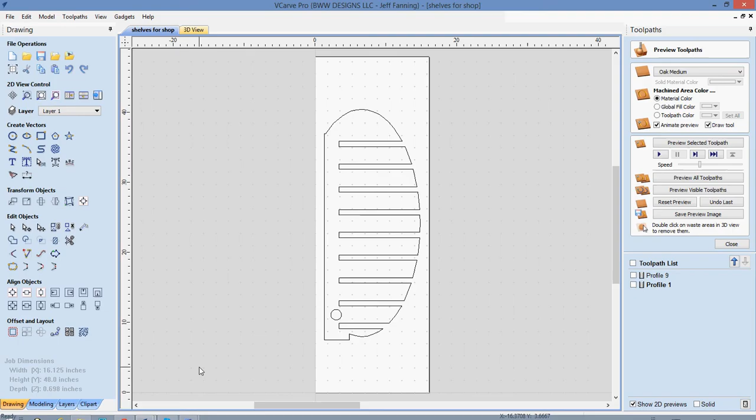I'm going to create a new file. I'm going to make a shelf, and I've made this shelf for my shop. I've got a lot of people that liked it, so I'm going to do a little video on how I drew it out. It's pretty simple, kind of for the newcomer. Here we go, here's a new file. I'm gonna hit new file, and right now it's at 48 by 49 by 96.

I don't need that much. Let's just make it 16 inches wide by 48. And my thickness is going to be 0.75.

I zero from the bottom when I cut through from the surface of my spoil board. I don't like to spoil the spoil board. And then I put my XY in this corner. Some people like to put it in the middle like that, but I put it in the corner.

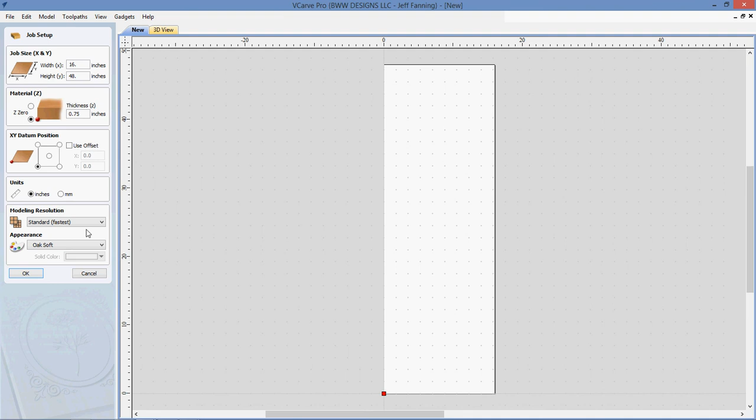Inches, and I'm going to put it on standard speed for resolution, and I like oak. I'm an oak guy. Alright.

I made the shelf, and I use plywood a lot, and I have spare parts laying around. I wanted to be able to remove the shelves and make them different lengths and different heights, for different amounts of loads of wood that I needed to stack on these shelves. I can do that, you'll see in a second.

So I wanted to make it with plywood, so I made it 0.75 inches because plywood is never 0.75, it's always less. So it always will work. It came out a little tight, but it works.

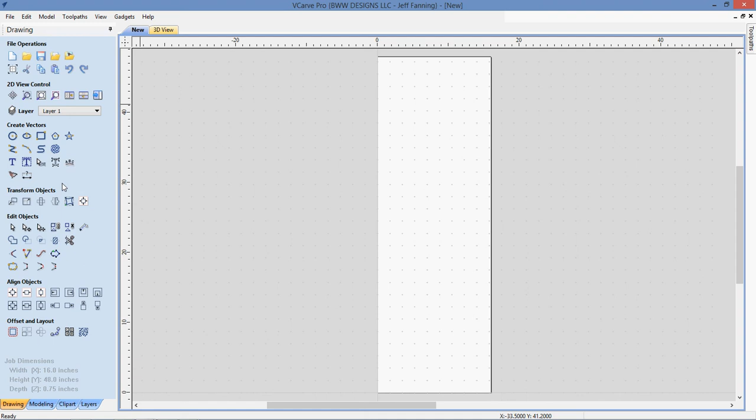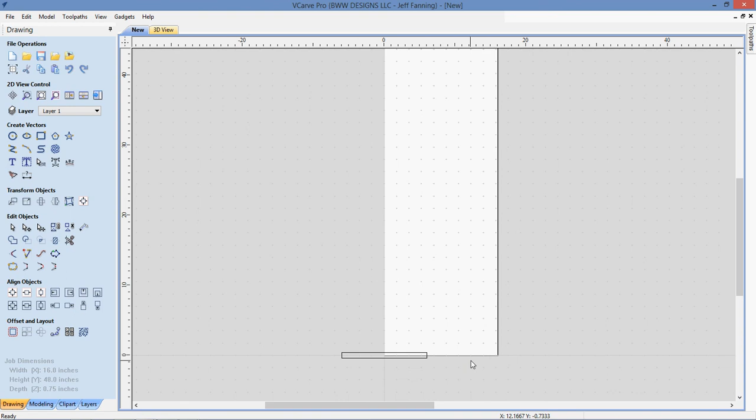Anyways, so we're going to get started. I'm making a rectangle here, and it's going to be a simple rectangle. I'm going to make it 12 inches across the width in X and 0.75 inches high. So we're going to create that, hit that button, and it pops in over down here. So I'm just going to F9 it, I call it, to the center.

And I want to make 9 of these. So I'm going to go to array copy, and then we make a copy of array copy on these, and I'm going to want 9 of them. I want 9 shelves, I mean you could put 15 if you wanted, I'm just going to make 9. So the gap I want in Y, I want them to be at least 2, and they're going to be 2.5 inches apart. I'm going to hit copy.

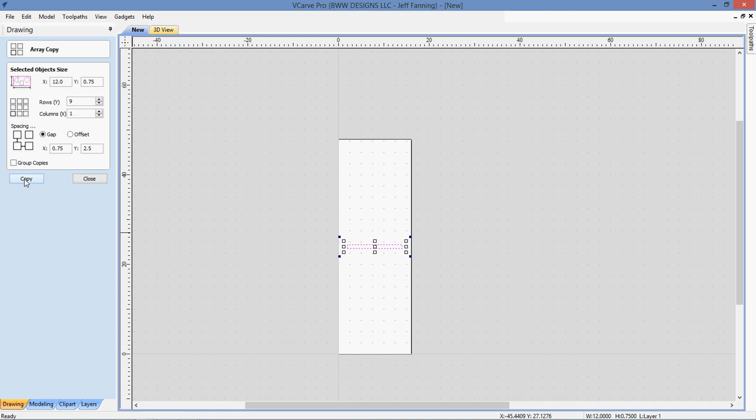Okay, and then now I'm going to F9 that, just hit F9. And now they're 2.5 inches apart, and those are what the plywood boards in between are going to sit on. You'll see here in a second.

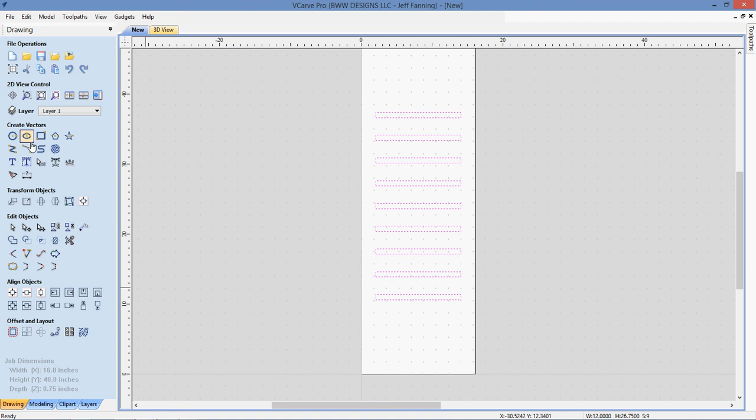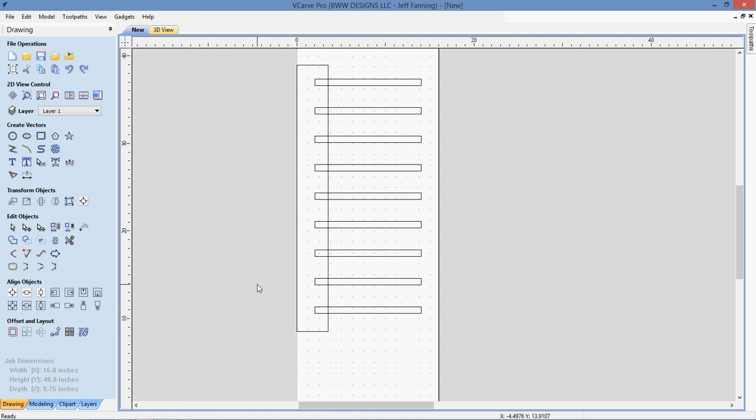Then I'm going to make it just a simple rectangle, and this is going to be the base of it. I'm just going to run it along this edge here, and I just want it to be a little longer on the top and bottom, and there it is. So this is what we got. So this is basically what it looks like.

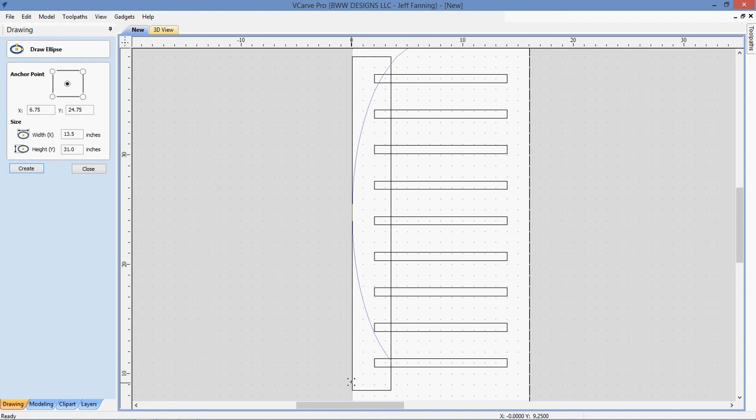But then I thought I'd be creative and make an ellipse, and take this ellipse and semi-center it in here somewhere and drag it. And we're going to drag it to the edge, and that looks pretty good. So we drag that to the edge. Okay, cool.

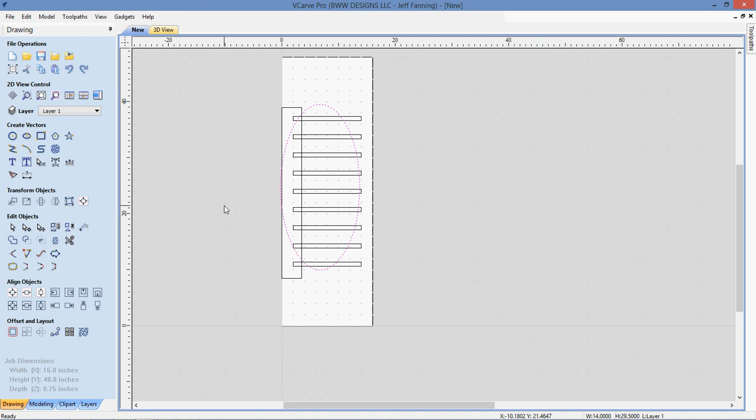Close, I don't like, I want to make it a little higher up, so I'm going to stretch it this way. And that's too high, that's cool. And stretch it a little bit down here, come down to there, to this point, I wanted to intersect there.

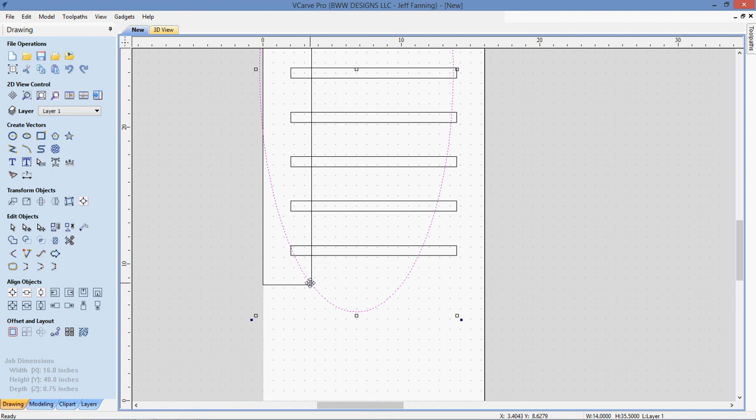Okay, now we're just going to cut some vectors. I'm going to cut these vectors because this is the shape of the shelf. It's going to be a curve, and so I don't need these. So we're just going to click these off. Simple. Oops, edit, undo.

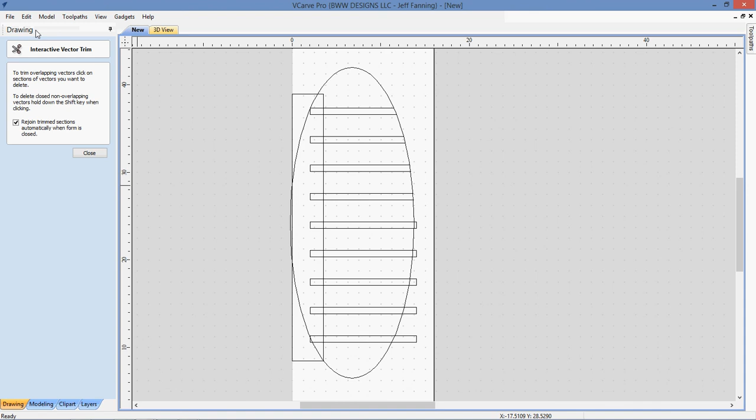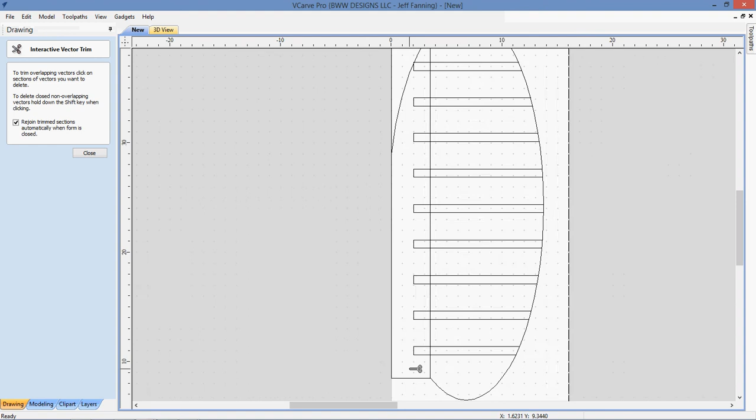Click, click, click, click, click. Okay, and I want to click this outer part, I don't need that. And this circle, I don't need that. And I don't need this. And this circle here, don't need it. Alright, click, try to get rid of this circle here real quick.

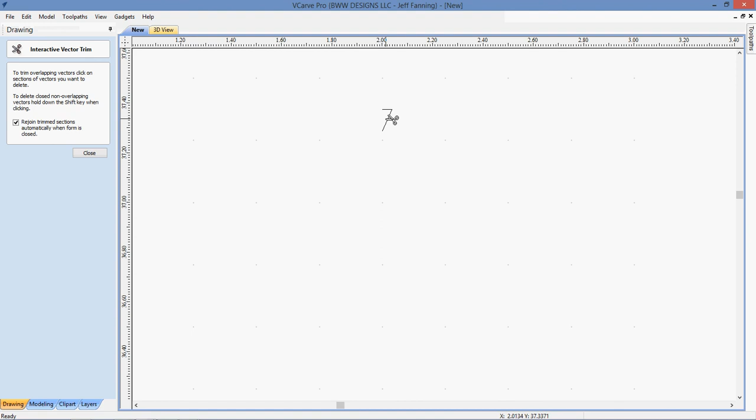Now we got a circle, and now we're going to remove this. We're going to remove these parts inside here. That's funky. Once in a while you get a little funky piece like that. And these should all click off just fine. Yeah, and we're just going to click these off here.

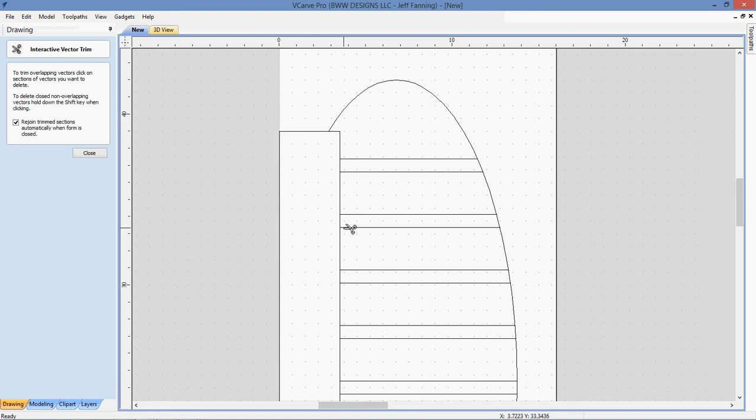We don't need these pieces. Let me undo these trims, I need these pieces in here for now. Now we're going to click these off. I don't need this piece.

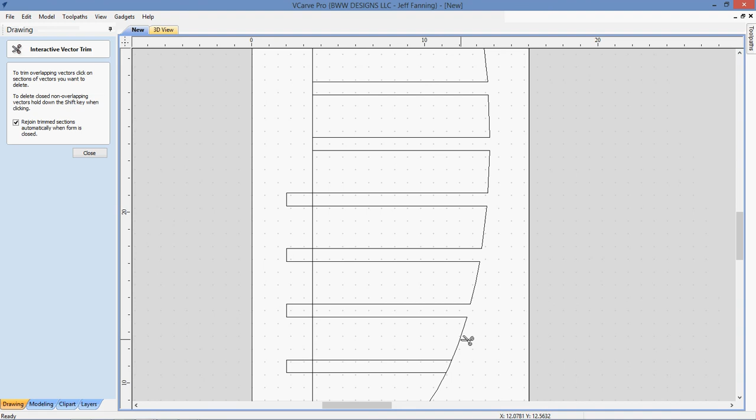Click, that's what was screwing me up earlier. Click, click, click, click, click, and click, click. All right.

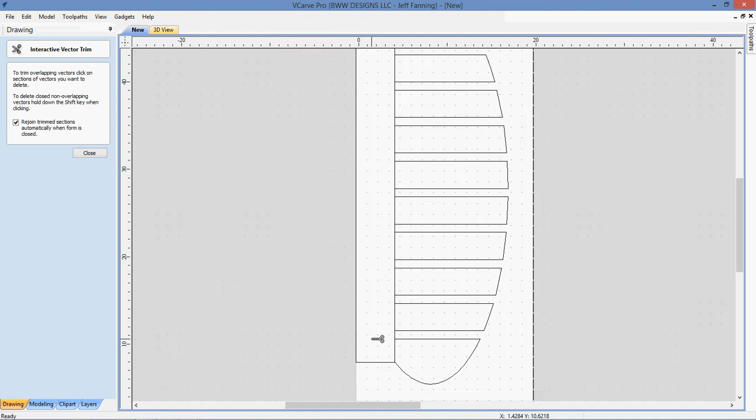Now, here we go. So we're going to click off these. We don't want this, this is going to be our shelves, and we got this funky thing going on down here. Okay, here we go, so there it is.

Well I got some more clicking to do here. I got to click off these because I don't need this. This is going to be part of our shelf, shelf, shelf.

So we just click this, this, this, this, and this, and this. Now we got a funky looking shelf. See, and it's pretty cool.

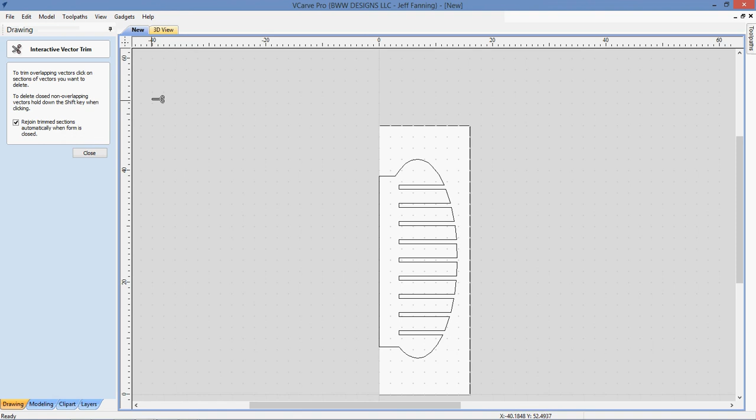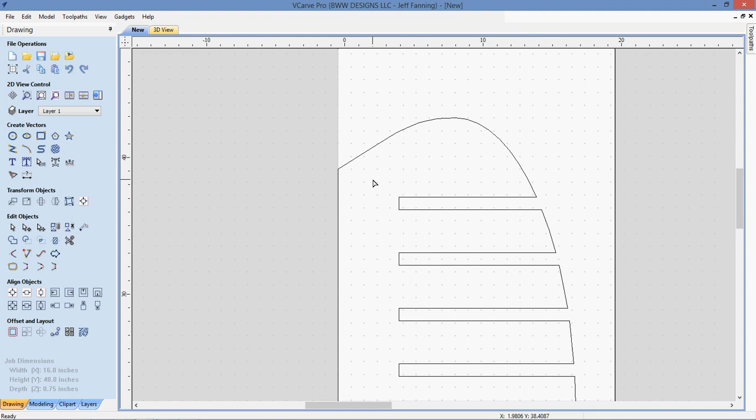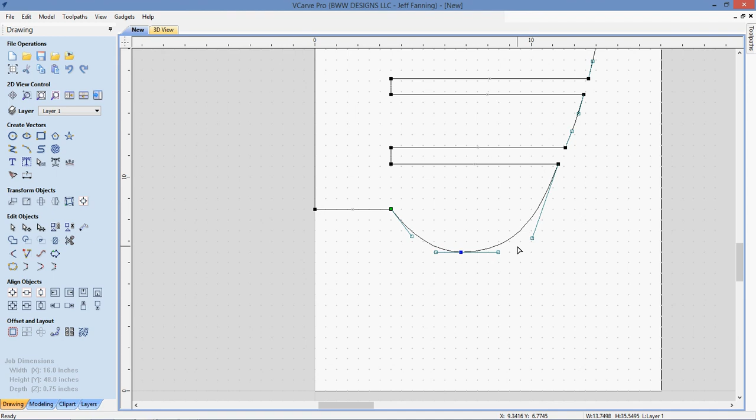There we go. That looks alright. Looks pretty good, looks pretty good. A little more curve on it. You know, I just like to make some curves. Why make it straight when you don't have to? Because that's why you got a CNC machine.

Okay, so here we go. I'm going to F9 this. It's going to fit right in the middle there. Looks pretty good.

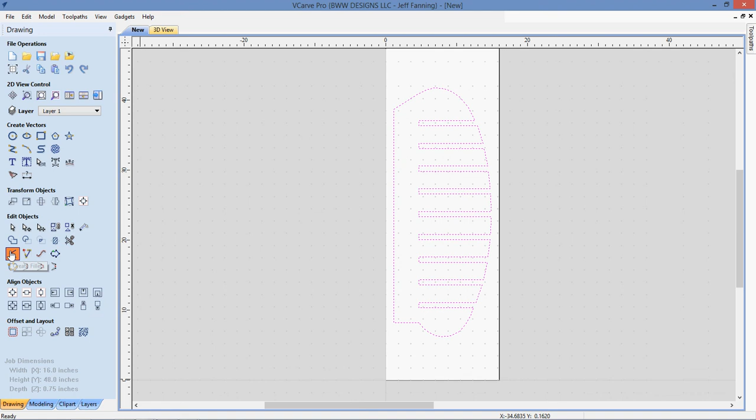I am going to do one more thing, I'm going to hit some fillets. I like to fillet a quarter inch, using a quarter inch bit around some of the edges, which there aren't that many. I could do all of these on the inside and curve them all out, but I don't need to.

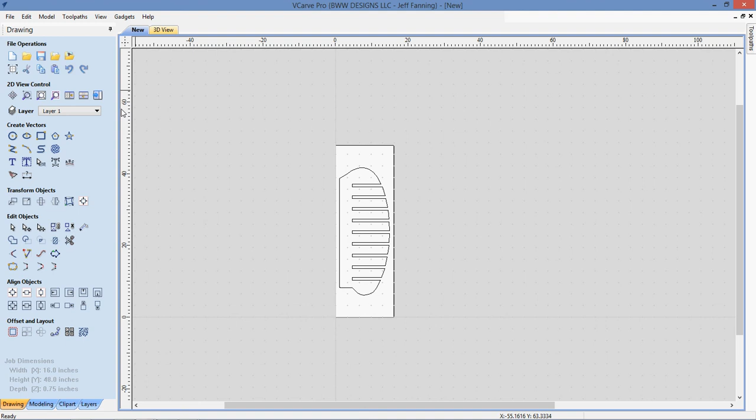Alright, I'm just going to go over here to the toolpaths tab, this little button over here. And we go over here to Profile, Toolpaths. And we're going to profile at 752, and we're going to go outside.

You know, we could add tabs. I usually on plywood do my tabs at a length of 0.127 with a thickness of 125 in 3D. I like 127, 125. They're a little dangerous, but I don't really have that many problems, and it doesn't leave barely any tab.

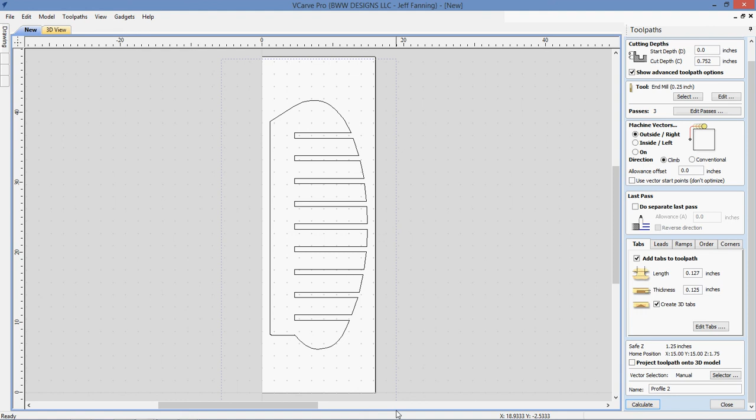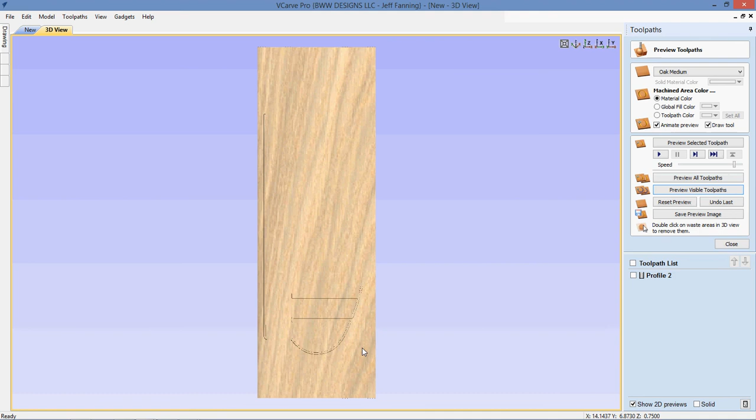It's a good measurement for me. I'm just going to calculate that once I highlight it. It's going to cut through, and preview visible. Hold on a second, we are not going to do it that slow. We're going to preview this, and I'm going to reset it for you, and again, preview visible.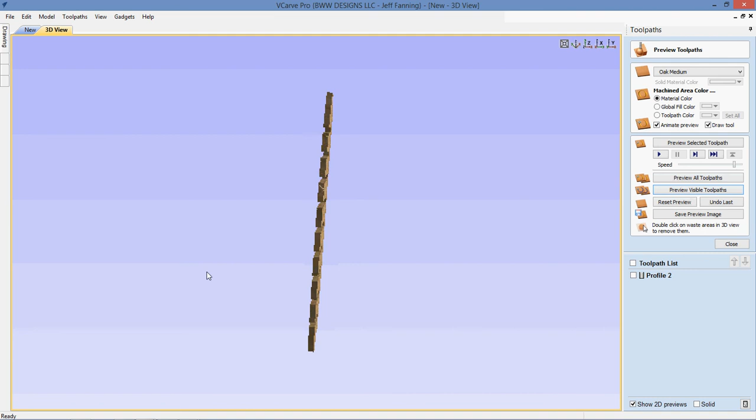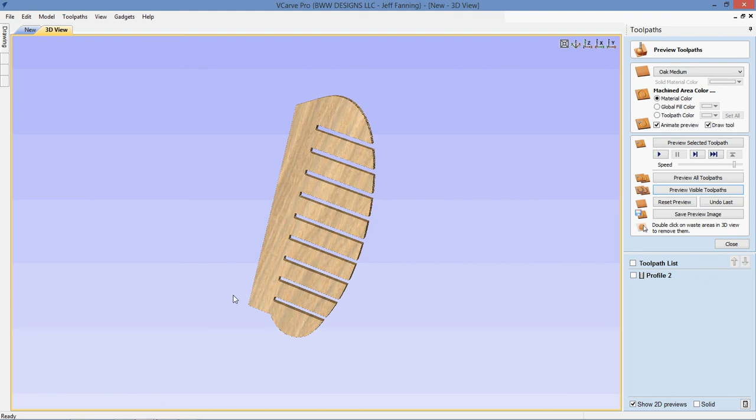And there it is. Now I used pockets on the inside. The pocket holds a few pieces here, there, and there, and there, and there. And then I attached it to the wall. You could make a piece that goes around and maybe pocket it in the exact thickness and make a real nice wall mounting piece. That's what I would probably do if it was not at my shop.

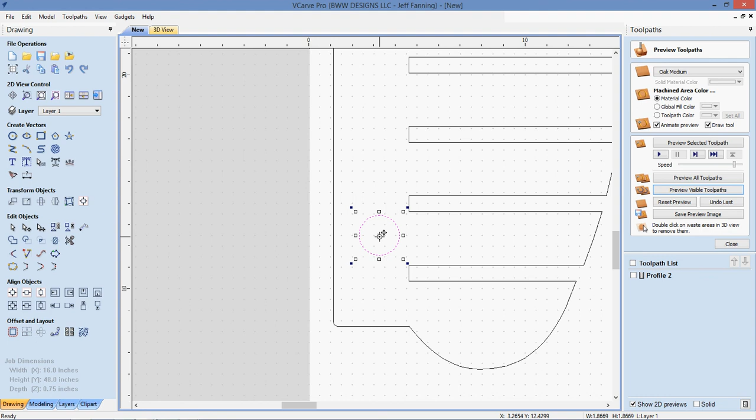And I forgot, I always add a little at my shop. I did it like this because I'm going to show you a picture. I put a circle in here. I always like to put circles in things and cut through, just in case I need to run wires through things at the shop.

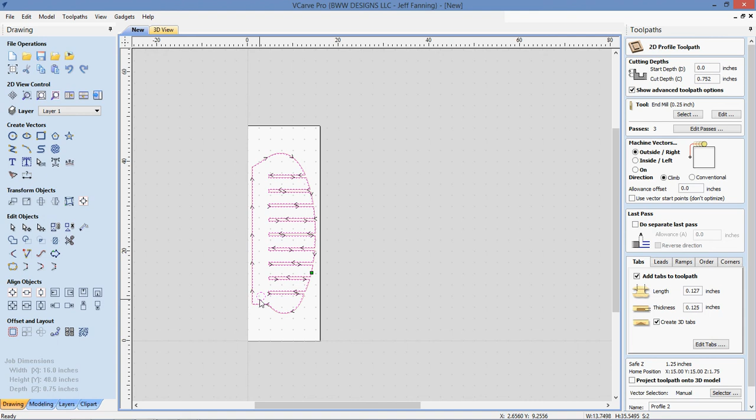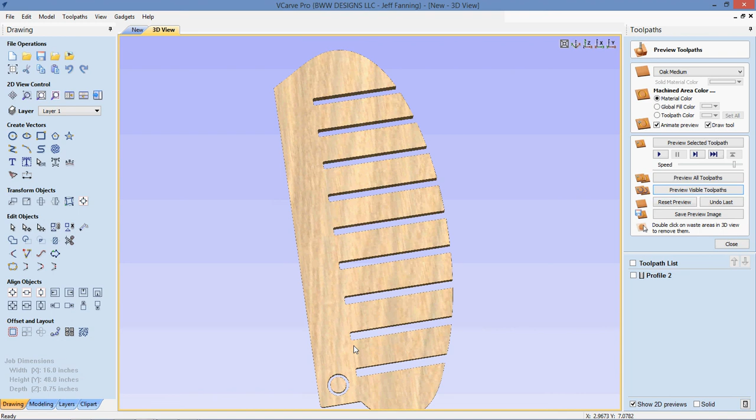So I'm going to edit this, go here, right click, hit edit, and then I'm going to hit shift and hit the little button over here to get the little circle lit up. Boom, boom, and then come back down here and calculate that out. I'm probably going real fast here. And now I'm going to preview that again with the circle. And then, of course, if you double click it, it disappears if it's cut through.

And that's it, and pretty much that's my little shelf. It really looks good, you can put any size length, you can have it overhanging, you can make it where I hang things up on it. It's great, for parts and dry racks and whatever.